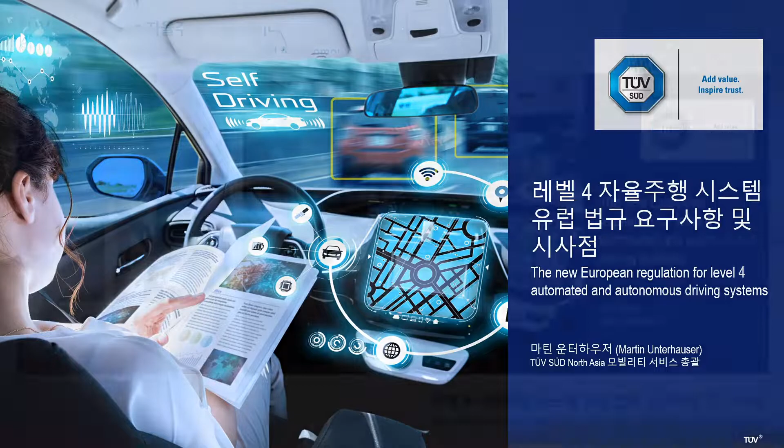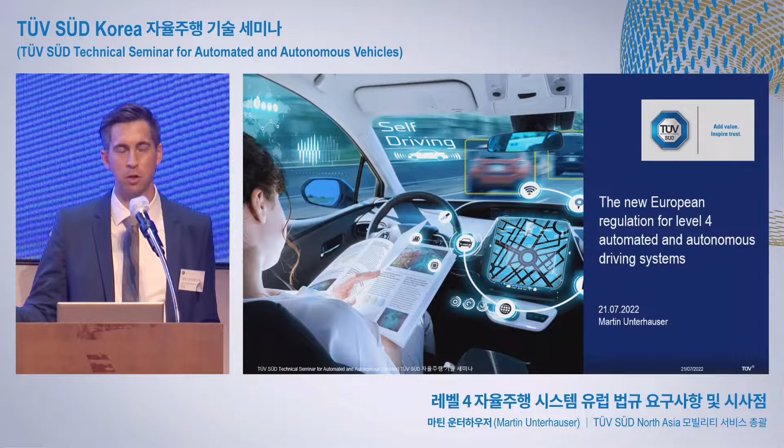My presentation, as already introduced, is now dealing with the European market. So we make the big jump from US to Europe. I'm very happy to present the latest requirements, recently very brand new, and to share some insights, especially from the perspective of a technical service.

I'm starting my speech with somehow a dream: driving autonomously. I guess most of us are dreaming of that kind of situation where we are just relaxing in the car and driving from A to B without worrying about traffic jams or whatever. But as you can imagine, it is not so easy, unfortunately not yet, because we have to overcome some issues.

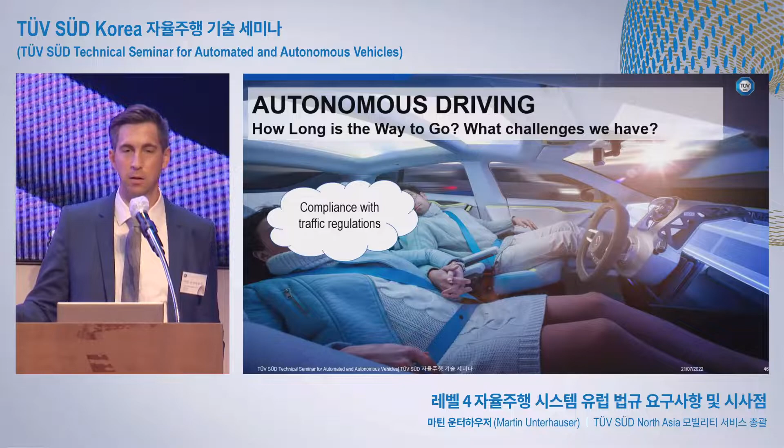Especially when it comes to automated driving, we have to manage compliance with the traffic regulations. As more and more regulations come into force, we recognize that traffic regulation has nothing to do with vehicle performance. Traffic regulation is the behavior on the streets, and it's difficult to translate these kinds of behavior rules for humans into machine technology.

This is something that will come up more and more after the technology is ready. We also have to ensure smooth traffic, because otherwise, if the vehicle driven by a computer is too careful, it will create other problems, especially in traffic mixed between human drivers and automated vehicles. So this is something we have to keep in mind in the future.

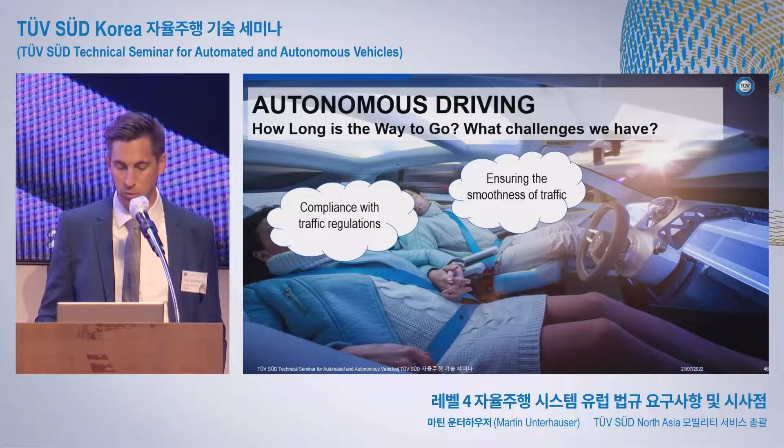Another topic coming up with the new requirements is the trust and reproducibility of new test methods. I'll come back to that point later, but as new test methods come into force, we also have to make sure they are just as trustworthy as they were in the past.

Last but not least, hazards and risks within the operating area. More or less, the real world is really an adventure park, and we have to consider the unexpected issues and hazards that will come up sooner or later.

And now, really last but not least, the scenario variety which we have to manage in that simulation world, as we have to account for almost every real traffic situation that can happen, taking this into account already during development as well as in the homologation process.

These are some of the challenges that will come up to us, and this kind of challenge cannot be solved by regulation alone. So I have to apologize—the regulation will help us a lot, but these additional problems will come up later on anyway.

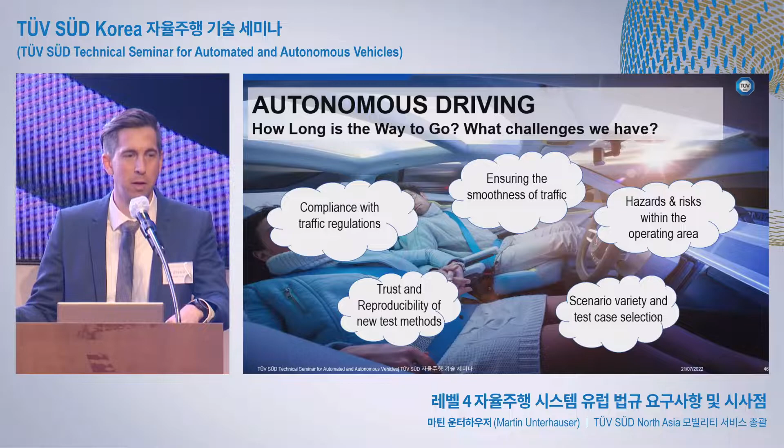As Stefan mentioned before, in the past—and I have to say still in the current situation—the technology is ahead of us. The technology for AVs, automated and autonomous vehicles, is somehow advanced, but the regulations are lagging behind. In between, we have of course some industry standards helping at the moment to support development, but when it comes to the final approval, we still have missing requirements covering that aspect.

The reason why I'm standing here on stage is to give you some insights about the first Level 4 requirement which is now enforced, hoping that this gap between the technology, the industry standards, and the requirements is getting smaller, and that we will see some progress on that end.

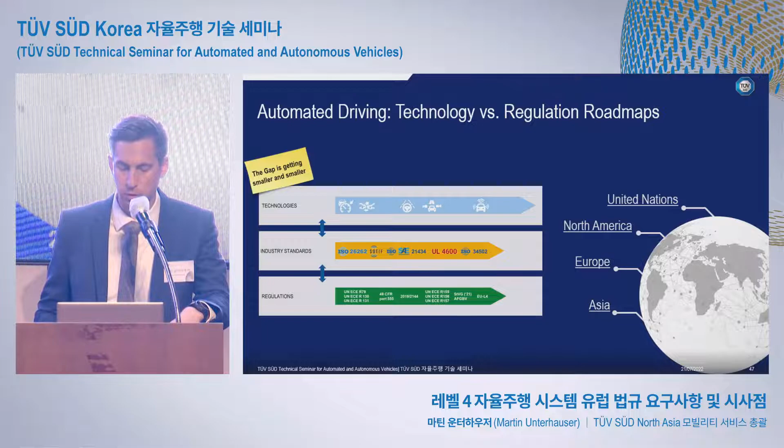Before I do so, here's one slide showing the hierarchy in the European approval system. Earlier, a colleague from SsangYong asked how UN ECE 157, which is ALKS—Automated Lane Keeping System—fits with the US. It doesn't really fit with the US, because its scope is the UN ECE, which isn't part of the European Union, but the European Union adopts it and is also a member of the WP29 group.

So this means UN ECE requirements are the highest level—they are above the European Union, but the European Union notifies them. The blue one with the flag of the European Union shows the relevant requirement and regulation for the whole vehicle type approval, which is 2018-858. This is the recently enforced requirement for whole vehicle type approval in Europe.

Just 1.5 weeks ago, there was the enforcement of the 2019-2144, also well known as the General Safety Regulation, GSR2. This GSR2 also contains the possibility to approve level 4 vehicles. So everything I'm talking about is somehow all related to that requirement.

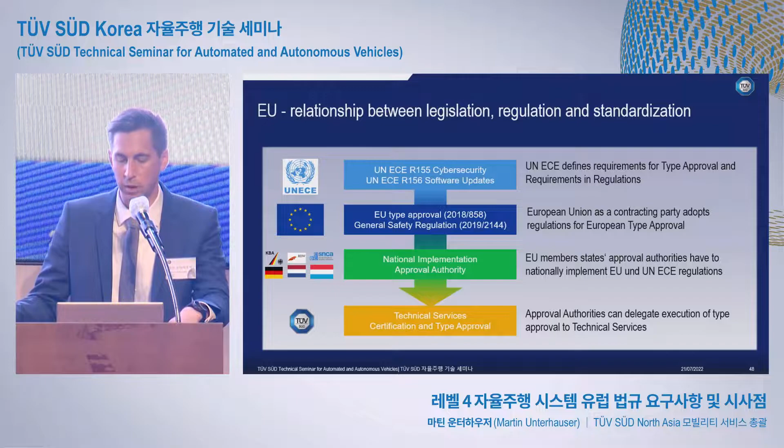So this was somehow just the introduction. Now we are coming to the topic of today, the second presentation session: the EU Level 4 requirement, which is part of the 2018-858. This is the whole vehicle type approval standard, and comes along with the General Safety 2. The General Safety is implemented in the type approval process, so the requirement for a level 4 autonomous vehicle is also part of that process. So we have two steps: the vehicle itself, and the functionality, the automated driving system functionality, which is on top and part of that type approval process.

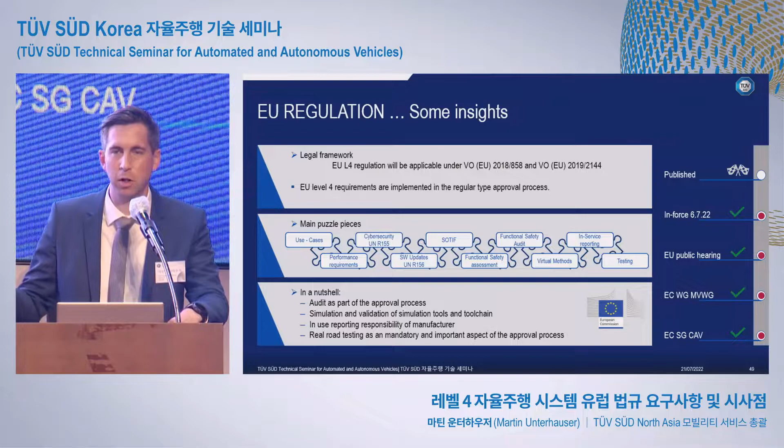So this was very top level, and now for the rest of my speech we will have a closer look into the EU Level 4, as it is also a new concept of type approval process. Those of you familiar with the type approval process, maybe dealing with homologation activities for the European market for years, will also be surprised how many new aspects are implemented in that approval process. So anyone in charge of the homologation process also has to adapt.

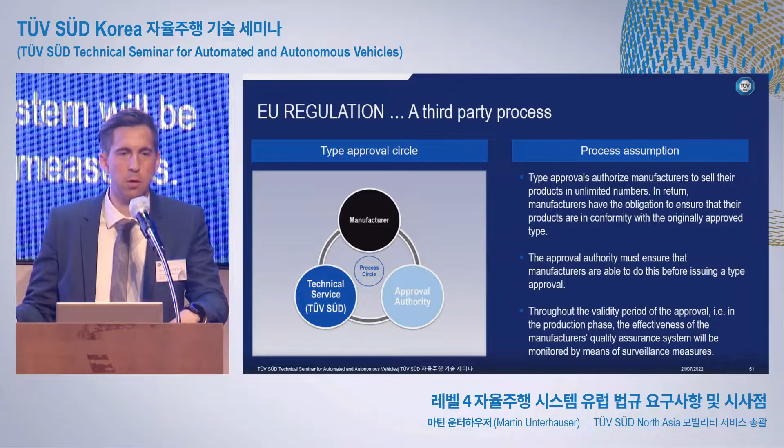Just for your understanding, this is explained very top-level, and therefore I recap the approval process. Compared to the US and Korean markets, where we have a self-certification system, in Europe we rely on a third-party principle. That means we have three parties involved: the first is the vehicle manufacturer, the second is the approval authority, and the third is the technical service, which I put TÜV SÜD as a representative of. In general, the manufacturer is responsible for the product, the approval authority is responsible for the overall approval process, and the technical service is the testing body on behalf of the approval authority.

So now digging into the requirements, I put this example because the Ioniq 5 is a very good example. In general, Hyundai is somehow the type approval owner of the Ioniq 5, and this is a normal traditional way. The vehicle itself got a European type approval and is therefore allowed to be operated on European roads.

I took the example of Motional, because they're using the Ioniq 5 in order to develop a robotaxi. So the Ioniq 5 is equipped with additional sensors. They have a LiDAR, radar, and whatever else equipment on board.

Now coming to the EU regulation, it would be somehow possible to have a multi-stage approval. The EU Level 4 allows a multi-stage approval. That means, in our example case, if Hyundai would somehow provide the type approval as a basis, Motional can set up on that type approval as a basis and add on top the EU Level 4 approval. And then this would allow Motional to operate those vehicles in the European Union. This is somehow the approach.

Of course, it's not necessary, so it could also be the case that Hyundai is doing the whole approval process for the AV function as a whole and just put one type approval. But this is an additional feature of the EU Level 4, allowing system suppliers also to get a type approval for the maybe not own-manufactured basic vehicle. This is something which allows additional opportunities.

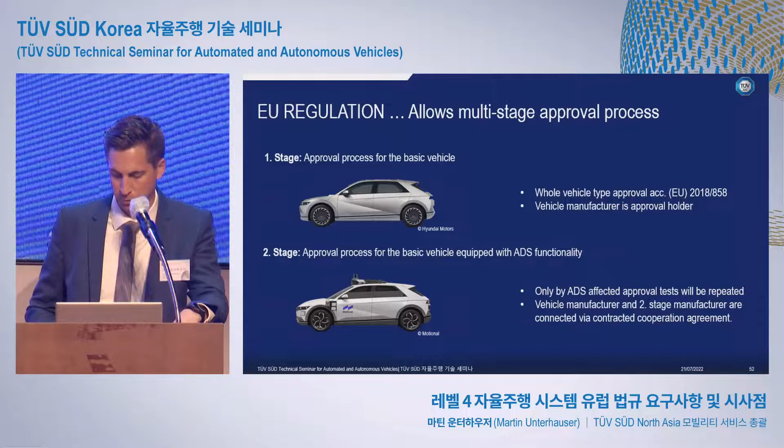So coming to the scope of the EU Level 4, as you can imagine, EU Level 4 is now the game changer in Level 4 technology. But on the other side, if there is a lot of light, then there is also some shadow. And now with the next two slides, I'm coming to the shadow, because it's not all good with this first EU Level 4 requirement.

As you can see on the use cases, number one is the goods and people transport in urban environment. That means you have a certain area where you have to predefine, and then within this area you can freely operate. But on the other side, it is limited to urban area. So if you want to go on the highway, this first use case will be somehow not relevant to you.

For that case, there would be number two, the hub-to-hub transportation. The problem with hub-to-hub transportation is that you have to predefine the start and the end point of your route. So the route itself is not clearly defined, but you have to at least define the starting point and the end point of your vehicle, which is also somehow limiting the availability of that requirement.

And number three, I would say, is the most advanced, or not most advanced one, but the most implemented one. It is the automated valet parking, which will be somehow the starting phase, I guess, because the technology is already very advanced and manufacturers will reach out to that first.

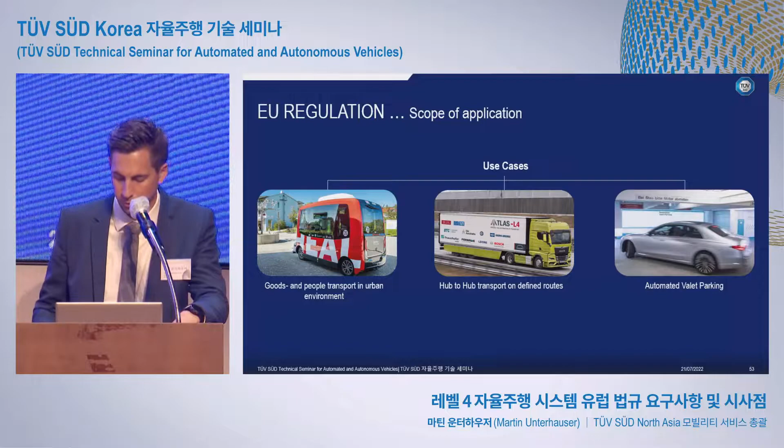I mentioned 2 negative aspects. The second negative aspect or weak point of the requirement is that this is not yet unlimited. So the European Commission is also a little bit careful, and they do not want to enable their roads from 0 to 100 for AVs. So they started in a smaller way, which means small series type approval. So if once a vehicle manufacturer or an AV system supplier is applying for the type approval, the maximum vehicles which can run under that type approval is 1,500 for whole Europe and maximum 250 vehicles per each member state. This is the maximum.

Otherwise the approval is no longer valid and you have to apply for another one. But there is already a positive sign from the European Commission, so they will track somehow the first year, which will be until the end of this year in 2023, and in 2024 they will decide to redo or remove this kind of limitation. It's already very positive because a lot of manufacturers are pushing on that end, that the limitation for the small series type approval will be removed from 2024 on. Then it is unlimited.

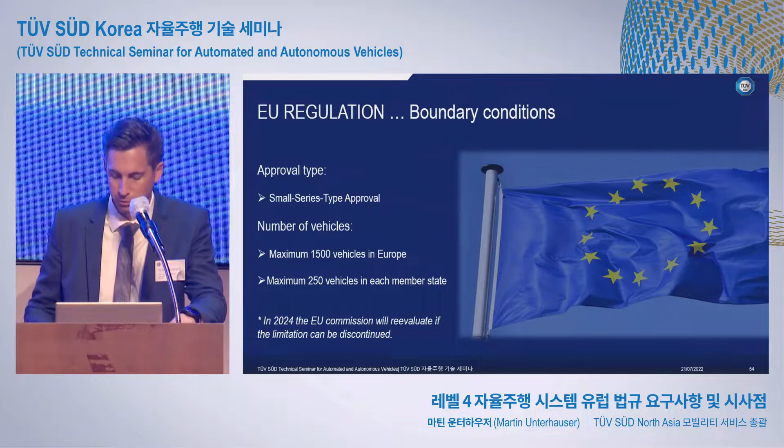So now going in depth with the EU Level 4 for automated driving systems. First of all, I want to show you somehow the general overview, what's in that requirement. As usual, the general part is somehow giving the indication, making some definitions about the operational design domain, defining the vehicle categories. Annex 1 is related to the information folders, so this gives somehow the indication and requirements of what kind of documentation, vehicle type documentation, the manufacturer has to deliver. As you can imagine, this is something which is also creating a lot of question marks, how deep we have to go as manufacturers and as a technical service, what kind of documentation is really required.

As this is really top-end, top-notch technology, there is also the possibility to put somehow a documentation package which is confidential and relies on the manufacturer's responsibility. This kind of package is only accessible if the type approval authority demands it specially.

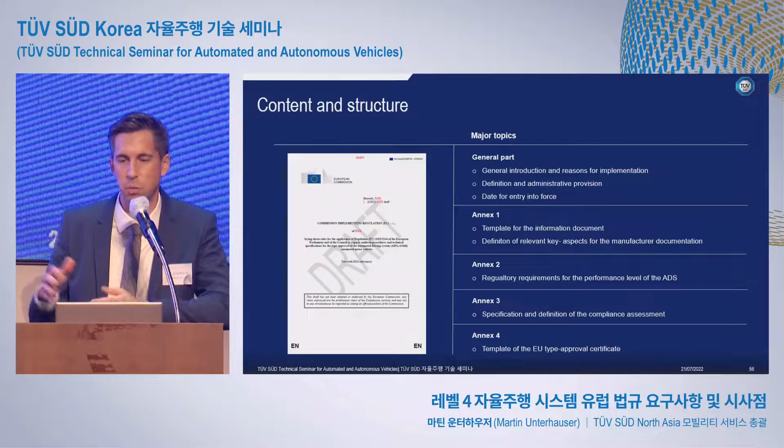Annex 4 is just for administration purposes, the template of the approval certificate, which is part of every European requirement, so nothing special.

Having a quick look into Annex 2, these are the performance requirements. Important, and I want to point this out, are the DDT - the dynamic driving task - under nominal traffic situations, under critical traffic scenarios, and under failure scenarios. Why do I want to point that out?

Because these are especially interesting for the safety assessment later on. The technical service doing the homologation process will dig into these scenarios because they will evaluate the safety concept of the vehicle type according to these scenarios and critical situations.

In addition, there are requirements for periodic roadworthiness tests. The responsibility of the vehicle manufacturer doesn't end at the point where the vehicle is in the market - the manufacturer still has to track vehicles on the road and do regular reporting to the approval authorities, especially if there are issues or incidents.

The approval authority expects very detailed reporting, which shows where self-certification and the type approval process come together, as the manufacturer's responsibility does not end at the time point where the type approval is issued.

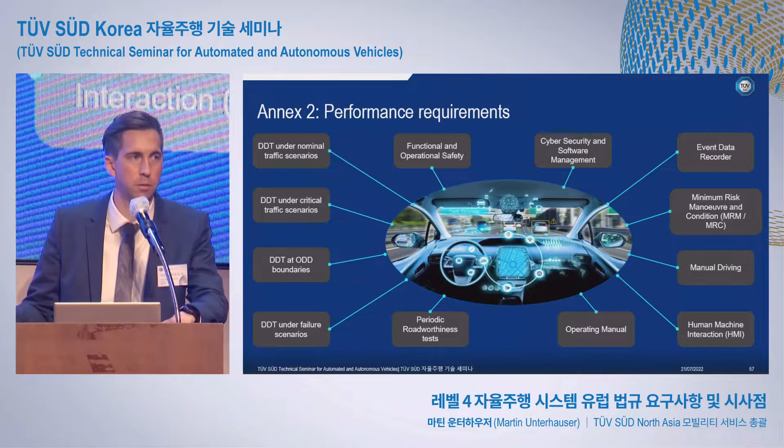Now coming to the most important one, Annex 3, because it's the testing annex, and since my speech is from the perspective of a technical service, this will be the most relevant for us also in the type approval process.

The EU level 4 is somehow continuing the idea of a multi-pillar approach. Those of you already in charge of ALKS requirements and type approval testing, or with a long-time relationship with test procedures and test scenarios of automated vehicles, will find the multi-pillar approach nothing new, but it will be extended because we have new specific processes implemented in it.

Very briefly, we start with an audit, which is followed by an assessment. Based on that, the purpose is to develop the process and the V&V strategies to assess the safety concept, with the core of the safety assessment.

We are checking out the simulation results and of course checking also the reproducibility and the trustworthiness of simulation results.

Then we turn to physical certification testing, which is still traditional business in case of homologation, but will also be a core factor of the homologation process of the future.

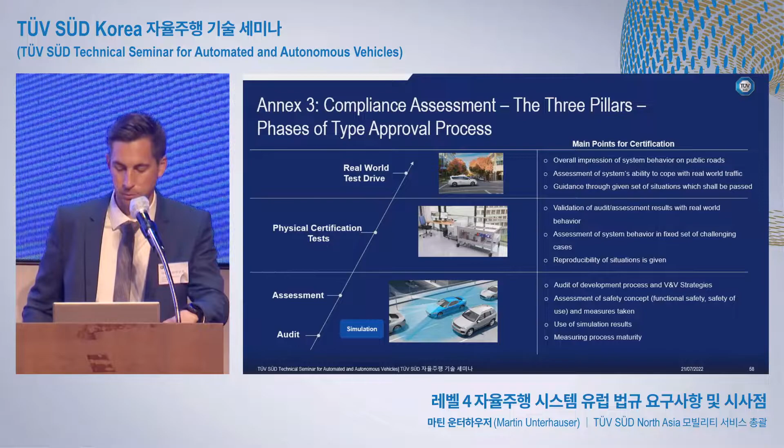So now I want to show you the pillars which are relevant and which build the house, the type approval house for the EU level 4 approval, as we have different aspects we have to cover case by case, and all these are separate, relevant pillars which then finally contribute to building up the complete house of the type approval.

This is in order to ensure that the manufacturer has a certain quality level and is capable of managing the development process in a safe and reliable way. In order to give this trust to the manufacturer and future type approval holder, the authority wants to execute the audit beforehand, and once the audit is done successfully, the rest of the type approval process can be executed.

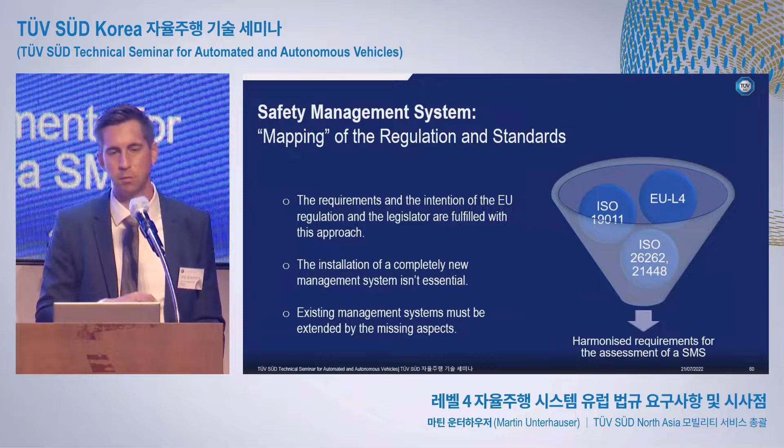And even beyond that, until the end of the life cycle.

So how does this process look like? First of all, of course, like every audit, there will be the planning of the audit. Then we have a pre-audit. We have a two-stage audit, where the first stage is the documentation check, and the second stage is the on-site audit.

So we are defining the vehicle manufacturer documentation. We want to have a look at the documentation, to see how, for example, the functional safety process is implemented, how there is the relation between SOTIF aspects and functional safety, how cybersecurity is implemented in the safety quality, and if there are certain measures, how is the documentation.

After reviewing the vehicle manufacturer's documentation, we do the second step, which is stage 2. We start the on-site inspection and check if the vehicle manufacturer's documentation is really implemented in reality. This is the typical audit behavior where we look at what kind of deviations will be found.

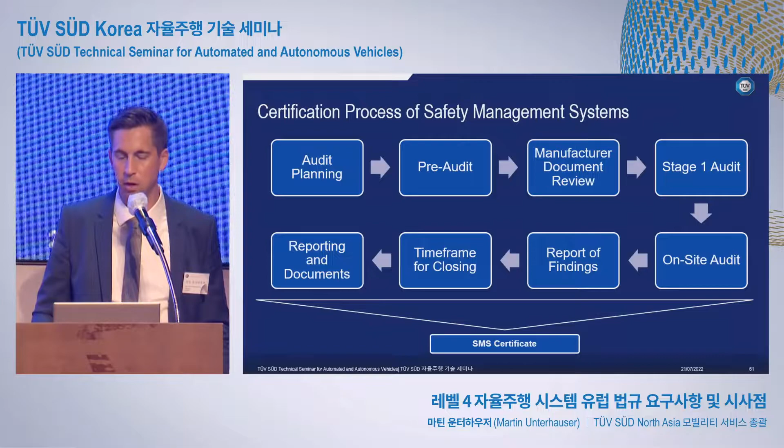Then finally the whole audit report is provided to the approval authority, and the approval authority defines the time frame for closing. So it's not in the responsibility of the technical service or the manufacturer when it's okay - the final decision of the safety management audit is done by the approval authority, who decides whether the safety management system is okay and the certification can be granted.

So what is the time-wise process on that? We have a three-year frequency, so every third year we have to do an on-site audit. For the second and third year, we only have surveillance documentation or surveillance checks, where we dig into certain processes already predefined in the requirements.

Just as an example, we look at the in-service reporting from the manufacturer. The manufacturer is required to provide very detailed documentation about the vehicles which are in the market and on the road. If there are any critical situations or scenarios, or in the worst case any problems or accidents, this kind of reporting has to be done ad hoc by the vehicle manufacturer. During the surveillance audits, we check if the manufacturer is following that up.

Coming to the safety assessment of the vehicle system - the audit was just a one-time job. Now we come to the safety assessment, which is the first step of the real type approval process.

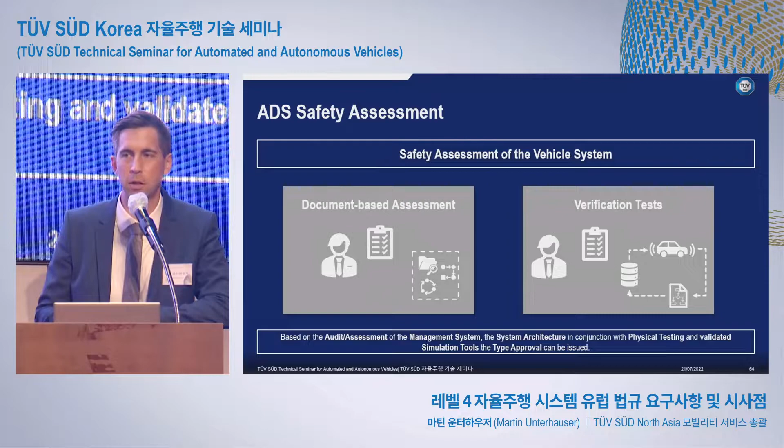Also here, a short overview about the assessment process for the safety architecture. First, in a practical way, the technical service will provide a list defining required documents. Then we have a kick-off workshop. We do the scoping of the vehicle, defining the vehicle type, the configurations, the relevant systems, and which variants and versions are covered.

Then the documents are provided by the vehicle manufacturer. The next step is the document review, which means the documents provided by the manufacturer are reviewed and checked.

Afterwards, there will be the clarification workshop in order to have some alignment, because due to the complexity of the documentation, it is expected that not every single point will be clear. So here we will have a clarification workshop in order to align between the technical service and the vehicle manufacturer.

Afterwards, there will be the verification of the concept, which is a derivation out of the document review and the clarification workshop. So here is an interconnection between the safety assessment and the testing later on.

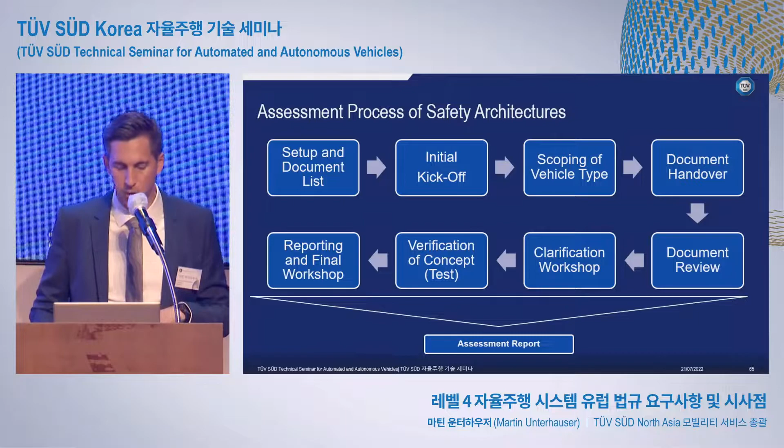Maybe this sounds very top level, so how does it look in reality? We are actually currently developing and creating checklists, because this kind of safety assessment is purely based on checklists. Here we are using the requirement as a basis, cascading down the specific requirement details and defining the fulfillment criteria based on those requirement details. I put on the right top side an example of how this kind of checklist looks.

This means our experts are also on site at the manufacturer, going through all the documentation and all the questionnaire checklists in order to get a complete picture about the safety concept of the vehicle and its implementation in the vehicle architecture.

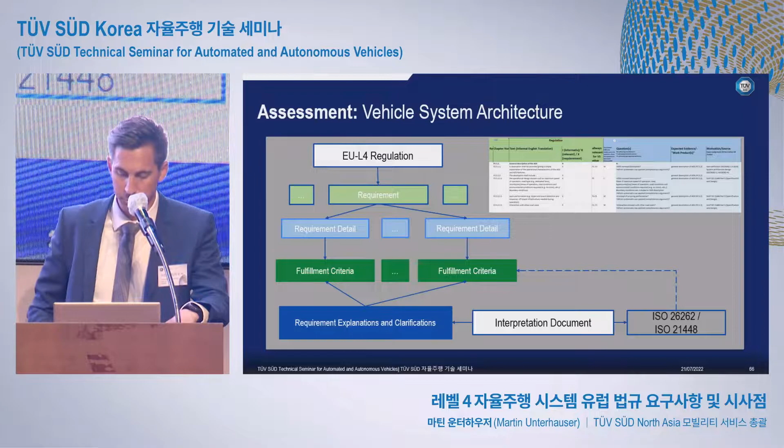As I already pointed out, during the surveillance audit, a very strong focus will be on the manufacturer duties. One of the duties is, of course, the reporting. As I mentioned, the responsibility of the vehicle manufacturer will not end at the point where the type approval is issued, but it will remain until the vehicle reaches end of life. Here the vehicle manufacturer has some reporting requirements.

During the development process, not all safety critical and safety relevant scenarios were considered, but if during the operation of the vehicles you track new scenarios, you also have to consider them and feed them back into the development.

So in general, to sum it up, the vehicle manufacturer has to show competence that the overall vehicle operation is under control, and there is a closed loop between the vehicle operation and the data coming from that operation, which will directly impact the maintenance and further development of the vehicle.

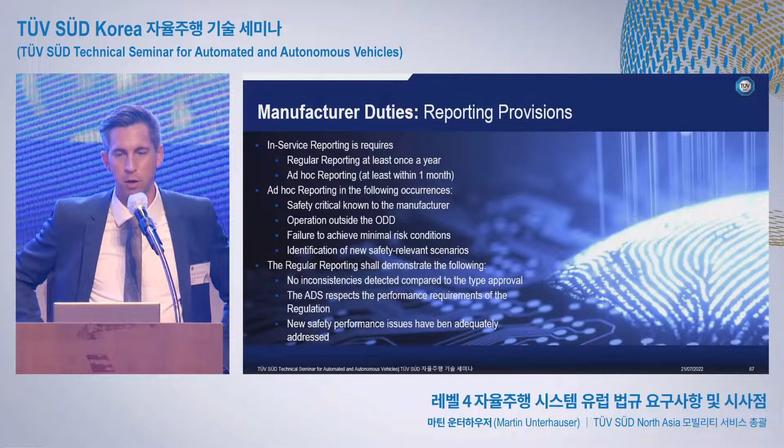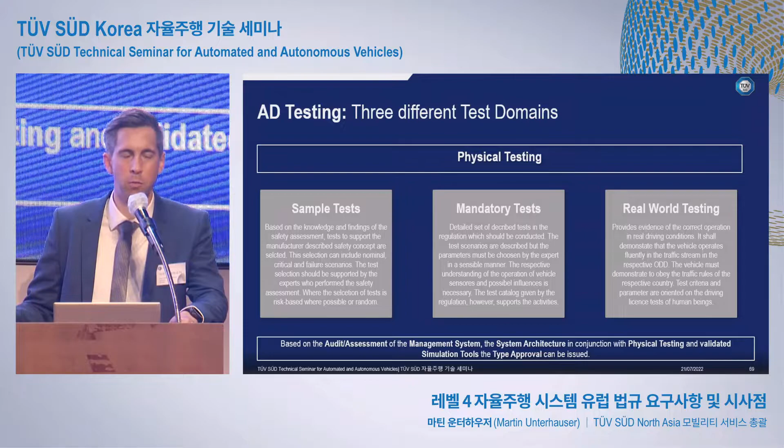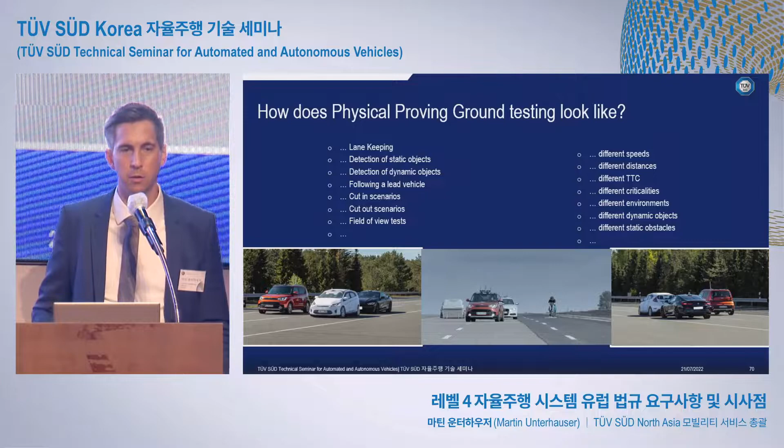TÜV SÜD is quite familiar with physical proving ground testing, which will also be a core of the vehicle homologation process. Since I don't want to go through all the different scenarios listed there, I implemented some videos into the presentation to give you a feeling of how this kind of scenario-based physical testing could look.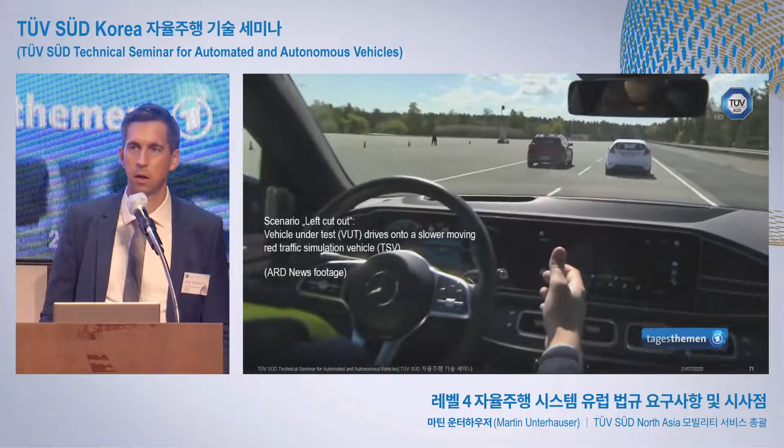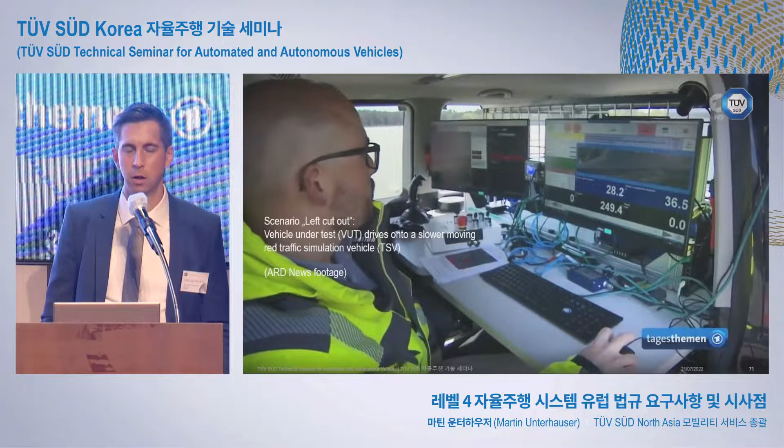This is based on the Pegasus project, where our colleagues in Germany were responsible for implementing the different test scenarios into real physical proving ground tests. This is the traffic simulation vehicle used as a target vehicle.

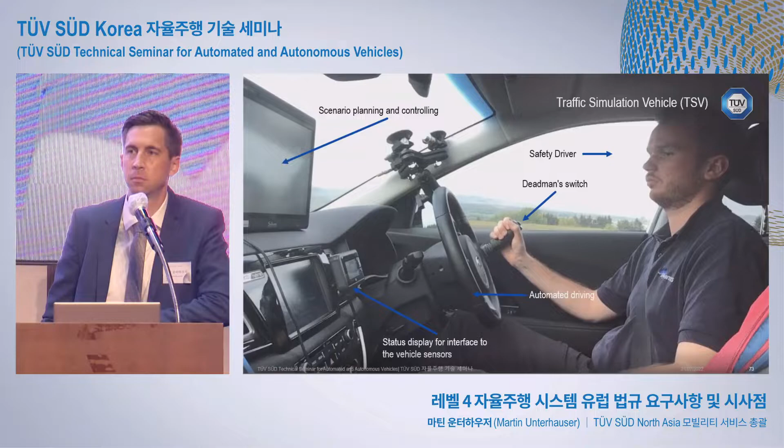Coming to the next pillar, which is the validation of simulation tools. Simulation is a core instrument in order to evaluate the safety of autonomous and automated vehicles, as we will not be able to test physically each and every scenario, so we need the support of simulation in order to do so.

EU Level 4 now has for the first time designated requirements for the trustworthiness of simulation tools. So it's no longer up to the manufacturer of the tool or of the functions, but an independent assessment of the capability of the tool is necessary.

The proof is needed for the capability, for the modeling and the simulation. The proof is necessary for the accuracy. How good is the reproducibility? How correct is the data flow and the algorithm? How about the usability? Is the staff using simulation tools trained enough and capable enough to provide sufficient results? And how suitable is the modeling and simulation process for the purpose of type approval testing?

All of that will be checked during the type approval process, and only if this can be passed can the results from the simulation also be utilized as a safety argument later on.

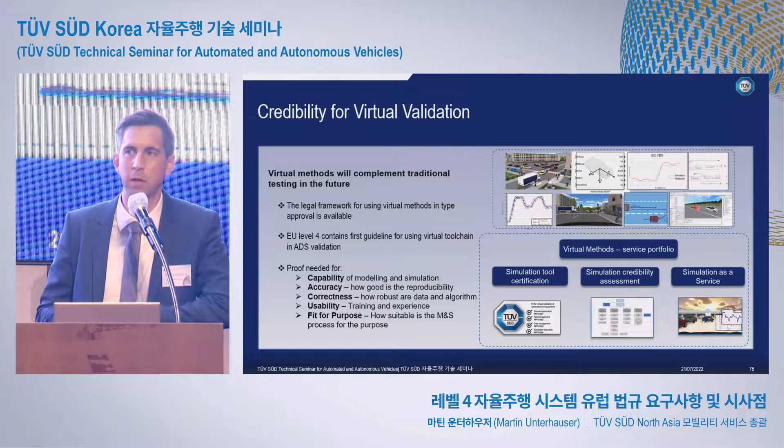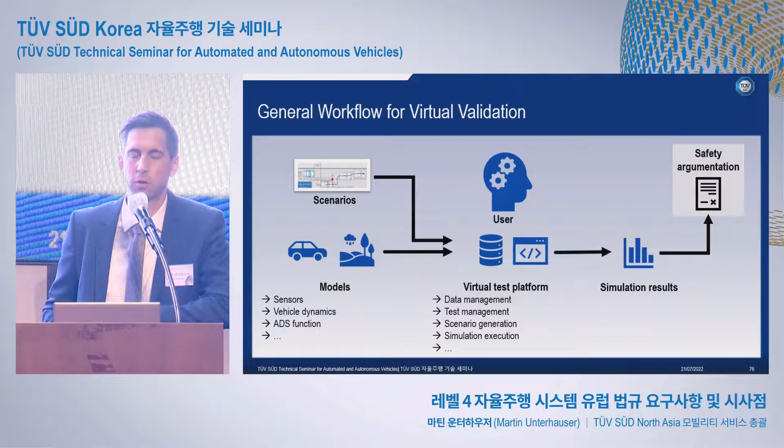Just to show the process, starting from the specific scenarios which are considered. Doing the modeling means the vehicle itself, the sensors, the vehicle environment, the driving conditions - put everything into the virtual test platform, where there's no limitation. Then the simulation creates the safety argumentation. This is the overall process flow for virtual simulation and the usage of that simulation data for the type approval process.

What are the challenges for that? Of course, the huge complexity, and especially when it comes to Level 4, it's also about the boundary conditions of the ODD, as the vehicle itself will be responsible for the fallback.

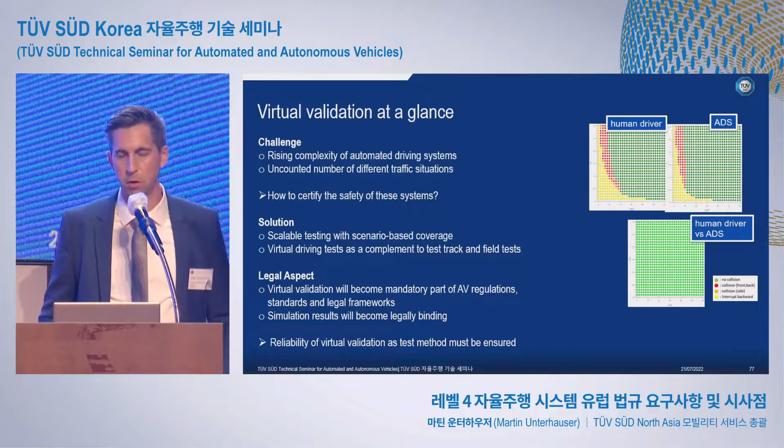Solutions are scalable testing with scenario-based coverage. And the legal aspect: virtual validation will become a mandatory part of AV regulations, which we see in the EU Level 4. Trust can only be ensured if we have an independent assessment of the used tools and the tool chain, in order to ensure the reliability of the related test results.

Coming now to the last point, the system type approval. If everything else is passed, we are coming automatically to the system type approval.

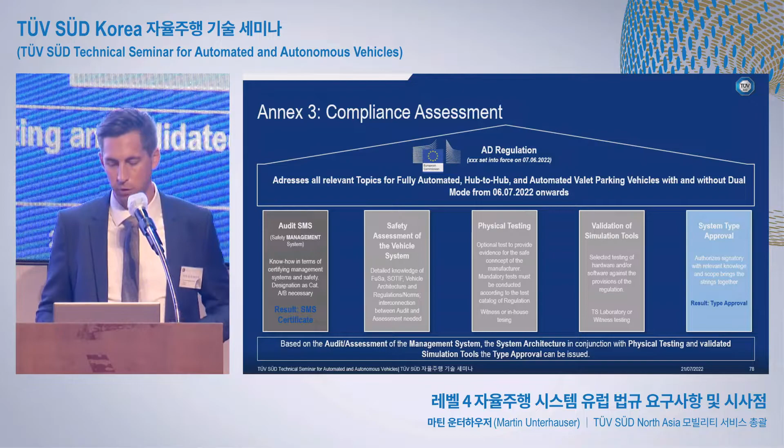This is called the operating license. The operating license is an independent process which is still necessary as long as the law for the driver license is localized. The law for the driver license in Europe is not harmonized - every member state has its own law. Especially in Germany, this law does not allow operating AVs without a certain permission. This is something which comes up afterwards: after getting the type approval, you also have to manage the additional challenge of getting the operational license.

I have to say this is still early stage, because we are in the first discussions now with the local authorities in order to grant it, but here we are still in a pilot phase.

All in all, this was my last slide. I would say EU Level 4 is really a big step forward, but on the other side, I hope you could also understand there are still some traps and some difficulties. On the other side, we have to start this way, because otherwise we will never come up with a suitable and sufficient solution.